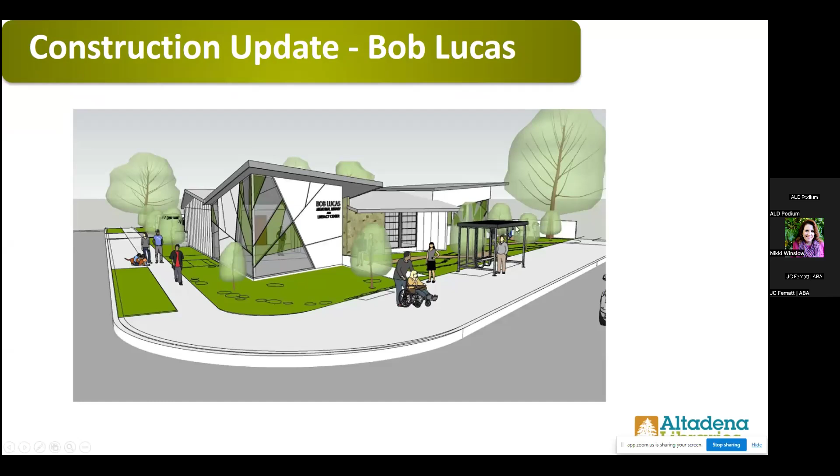So, construction update on the Bob Lucas. I'm actually going to hand this over to our construction manager, Ben, if you want to come up here real quick and introduce yourself.

Thank you, Jennifer. Good afternoon, everybody. My name is Ben Sawyer. I'm the construction manager with Huckabee for the Bob Lucas project. So I know we've got a lot to cover, so I'll make this really quick here.

We started construction last month. The groundbreaking ceremony was held on April 18th. This is an overview of the project here. You can see in the dark gray shadowed areas where we're doing our 2 expansions for the project. The good news was the project bid below the estimate, so we're off to a good start there.

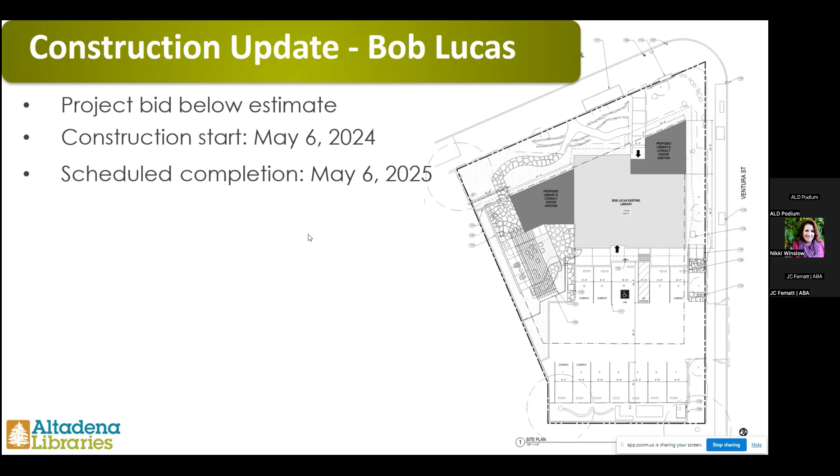We had our construction start on May 6th of last month, and our scheduled completion, we're expecting May 6th of next year. We are going to do everything we can to push that forward if possible, but that's kind of what we're looking at right now.

To provide a quick update of where we are right now, like I said, we've only been started for about a month here. So this is the exterior of the building, seeing the front of the library where the east side expansion is going.

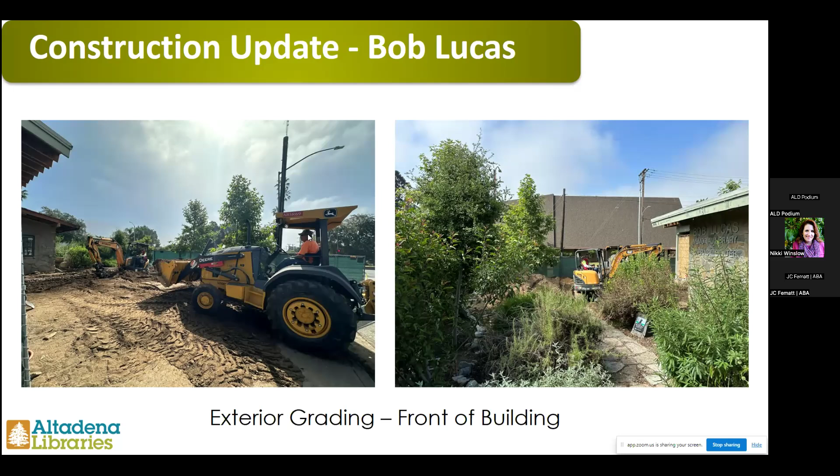We began grading and over-excavating here, getting the soil ready in order to build a new structure on it. And as we're doing that, we're maintaining the garden as best as possible. We have to take out some of it in order to expand the building, but we're doing our best to maintain that garden as best we can.

Moving to the inside of the building, you can see a before on the left side of the screen of what the building looked like before. This is facing the north side. And like I said, we've started demolition inside here.

So that's kind of where we're at now. We've exposed the beams and eaves, and where that plywood is on the back north wall there, that's where the building is going to expand outward on the north end.

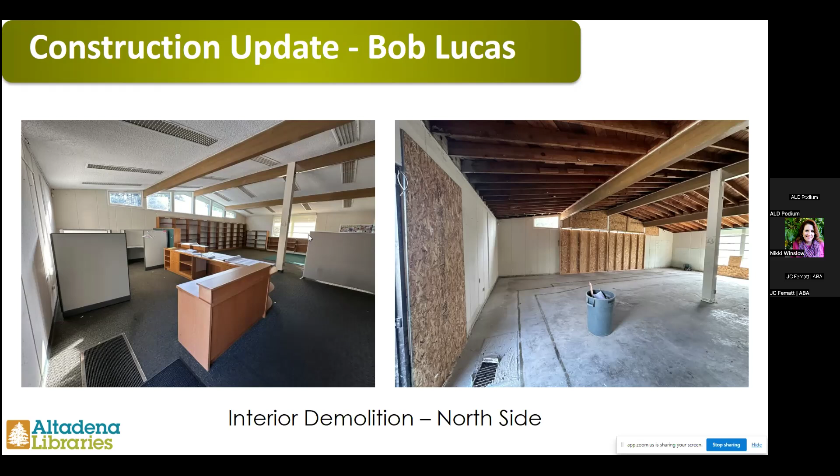And then for my final slide here, we have the south end of the building. This was previously where the restrooms were. You can see we've opened that and exposed that, and have started to do some underground work here to prepare for the new plumbing, new HVAC system for the new building.

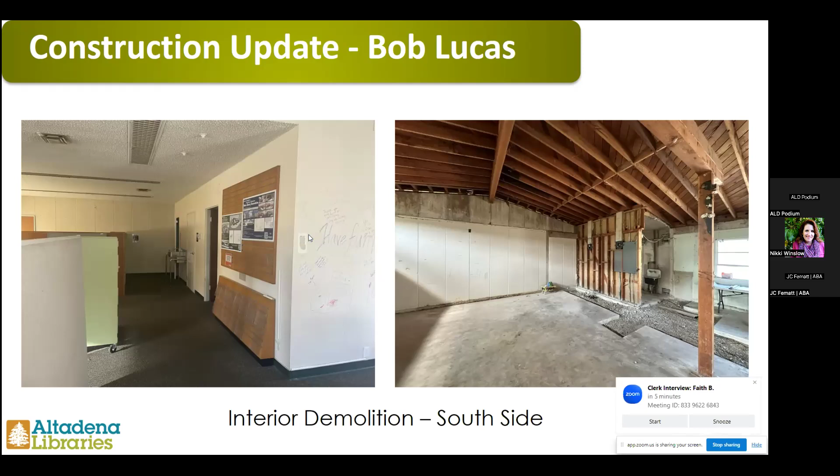Great, that was all I had.

I haven't been over there lately, so I'm unsure. Let me take a look at some photos and I'll get back to you. I'm just concerned about it being covered or whatever with all the vibration and work. Yeah, absolutely, let me take a look at some of my job site photos.

I'll let you know. Any other questions about Bob Lucas construction before we move on? I'm just trying to keep moving as quickly as we can because we've got a lot to cover in our hour, but stop me if you have anything.

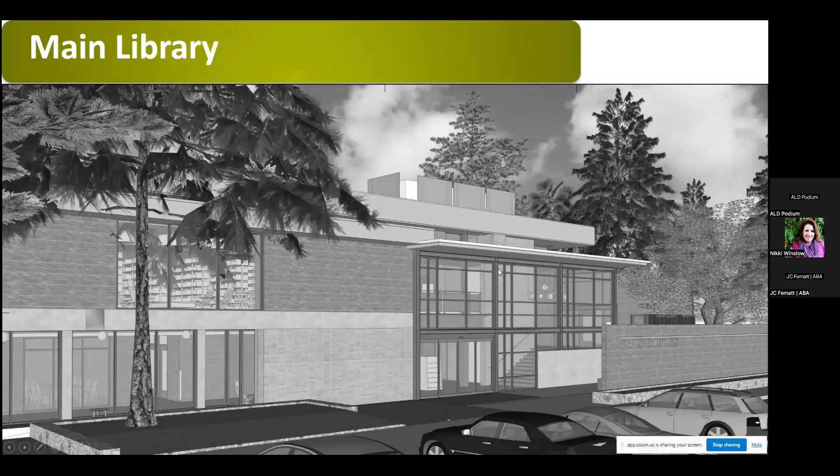Okay, moving on. All right, the main library project status. We're in the construction documents phase, about 75% complete. We're doing constructability review right now.

We've already submitted to regional planning for a conditional use permit, just like we had to do on the Bob Lucas. It seems to be moving a little bit slowly, but we're trying to get a bead on what's happening there and make sure that keeps moving forward.

We're also preparing to submit to the building department for plan check in the near future. And again, this project will go into construction after Bob Lucas is complete, so that would be at the earliest May of '25, assuming that we get all the approvals that we need by then. And that is all I have. I'm going to pass it over to, yeah, go ahead.

Do you know what the CUP is for? The CUP is because it's a library in a residential zone and didn't have a previous CUP. We argued that it shouldn't need one because of the minor amount of work we're doing. When we were working on the Bob Lucas project, they mentioned early on that if we weren't adding so much square footage, we could do this as a site plan review. So we asked that question multiple times: can we just do this as a site plan review since we're barely adding any square footage? The answer came back no, this is a CUP. So we're just trying to keep it moving forward as best we can and hit our scheduled date.

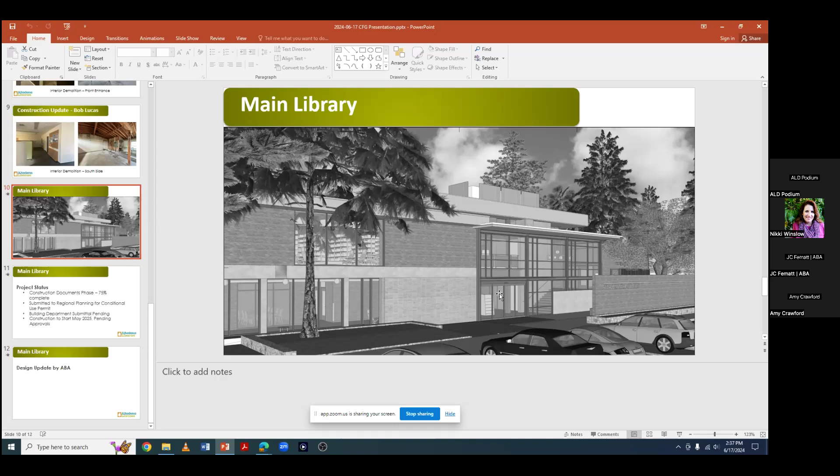But I'll turn it over to Amy now. Well Mark, let me ask you this - so there's not gonna be any little secret dots with your name in it, or somebody's name, that we won't know until 20 years later? Subliminal messages, yeah, well some architects, that's a great idea. The closest thing I ever did to that was on a block pattern, I used Morse code on a Boy Scout project - I think it said something like 'Boy Scouts are cool.' So we're nice, good people, if we did anything like that it would definitely be in the office. So is this how you think you're gonna get your name on it? Is this a request? People named Mark are awesome, yeah.

I was simply going to ask if at some point there would exist an elevation in full color rendering. We will do that actually - I feel a little embarrassed, I didn't think 'oh, they'll want to see this,' because we were so excited from looking at it.

Hopefully Amy may have that PDF and you can see what that wall would look like. Even if it's sent after, it'd be amazing just to get a sense of how all those pieces fit together. We probably owe you an updated image of at least the south side. What we really want is a model.

Amy, you there? Yep, I'm here. Sorry, can you see my screen? I hit share. Yeah, we can see your screen. We're gonna turn you up a little so you don't have to yell.

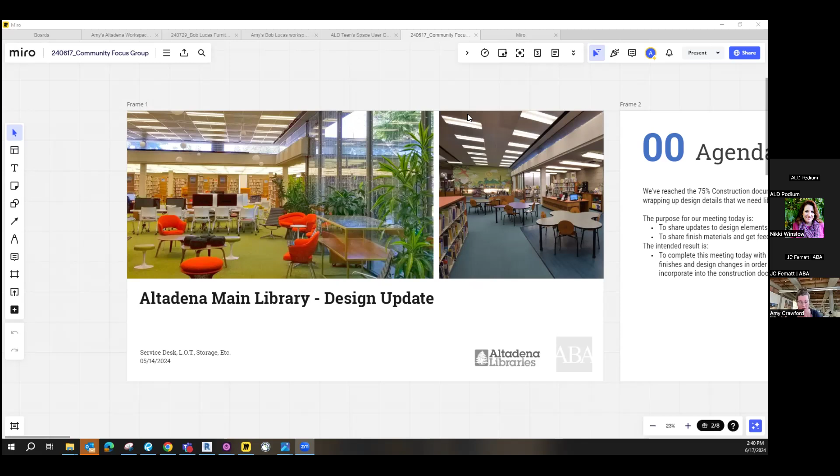If you have some really difficult questions, ask her. Thank you, Mark. So I cannot see all of you, so I don't actually know who I'm presenting to, but I think you can probably see me. What I'm going to share is not an entire design update, it's really just the last design update that we had a meeting for. It's going to show you some key renderings of some key spaces and some interesting updates that we wanted to share with the group. So again, not going to cover everything, this is just the slides from that meeting.

One of the main things we talked about is the service desk, the main service desk on the main level. We went through several iterations of this and decided to build something out that had more presence in the space. We really wanted to utilize the wooden tiles where we could in the library, and the service desk felt like a great space to do that. We received feedback from the facilities committee about some iterations we had shown, and this was the result of making those updates and changes.

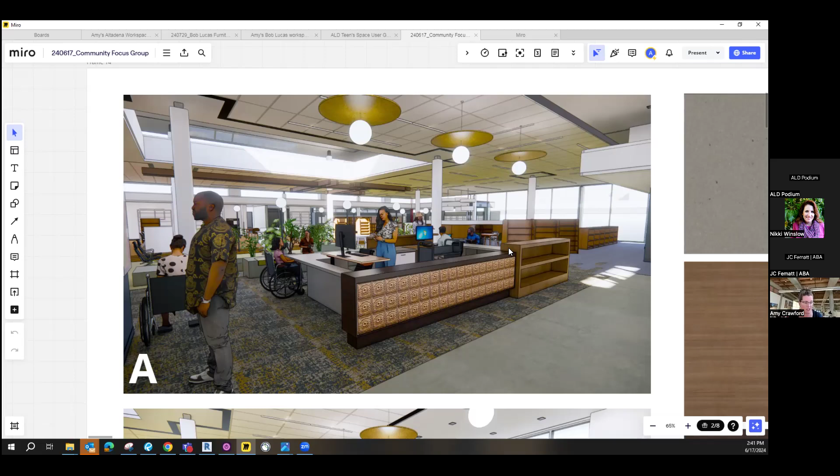So we dropped everything a little bit lower. When people come in the front door, just to the right of my cursor, they come in and it's welcoming. There's going to be a bookshelf here where they can display a variety of items, from books to things that maybe got created in the makerspace, pamphlets, or info about upcoming events. Then the desk surface is low around the entire thing, allowing access for people that might be mobility challenged or in a wheelchair.

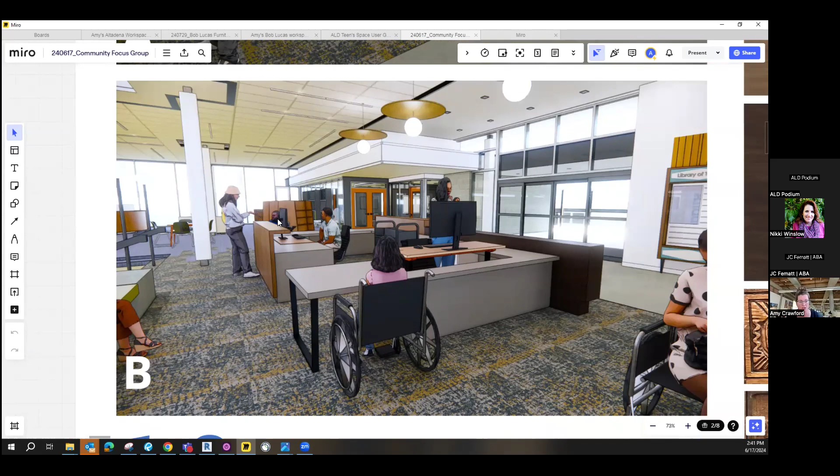The desks for the staff members are height adjustable. That's pretty much standard these days for ergonomic reasons, allowing people of different body types, heights, and sizes to feel comfortable at the desk—they can sit or stand. There's also a transaction surface here that allows somebody to, I feel like I'm showing my age when I say write a check, but fill something out or write something.

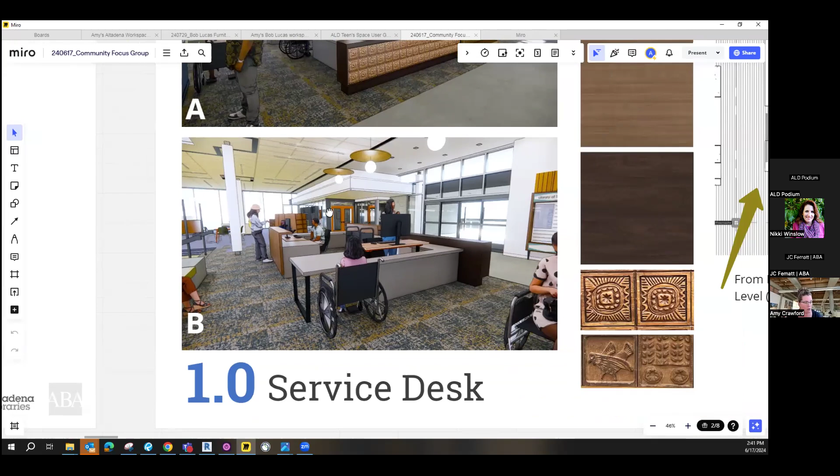You can see a bit more of the library in these shots. They're not fully rendered, they're just focused on the spaces we're looking at, but you can see the application of some of these materials to the desk. We're looking at using a material with a bit of a concrete look for the work surfaces, and then incorporating some warm woods and those wood tiles, so it'll be a nice warm juxtaposition against the concrete look.

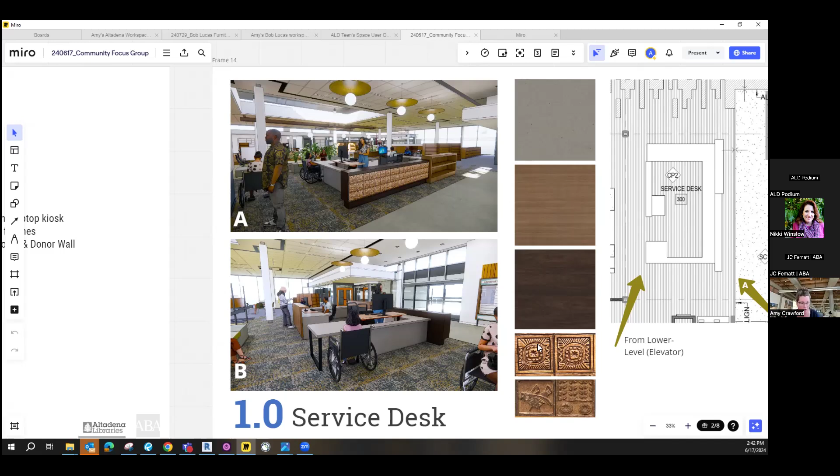I don't know if you guys have questions, so I'm going to keep going—maybe Mark, if somebody has a question, you can let me know since I can't see. Yeah, I'm keeping my eye out for that. Okay.

These arrows show you a little bit of what we're looking at. This view is looking at it from this direction as you come up the stairs, and this view down here is looking as if you've come off the elevator and you're coming towards the desk from there.

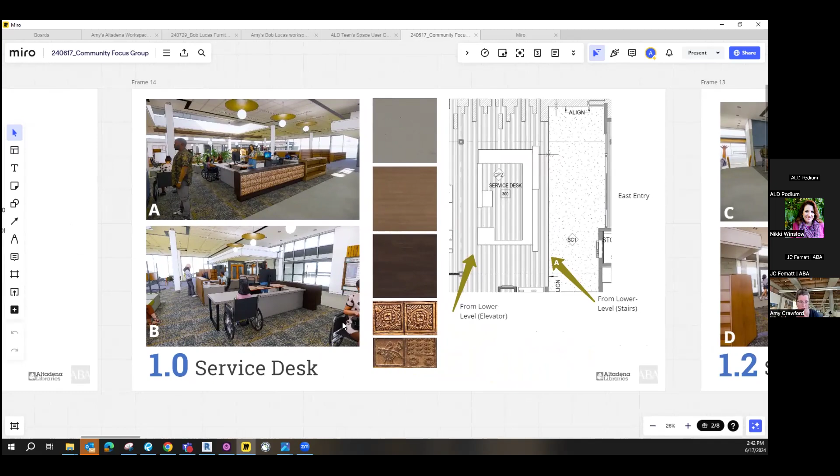Just two more views of that same space. You can see somebody waving here, you head down the stairs here, so you can see another view of the desk. This is from the opposite corner—this white shape here, there's actually a column there, so we just showed the column kind of so you can still see the desk. This is where the current Friends of the Library book stand is.

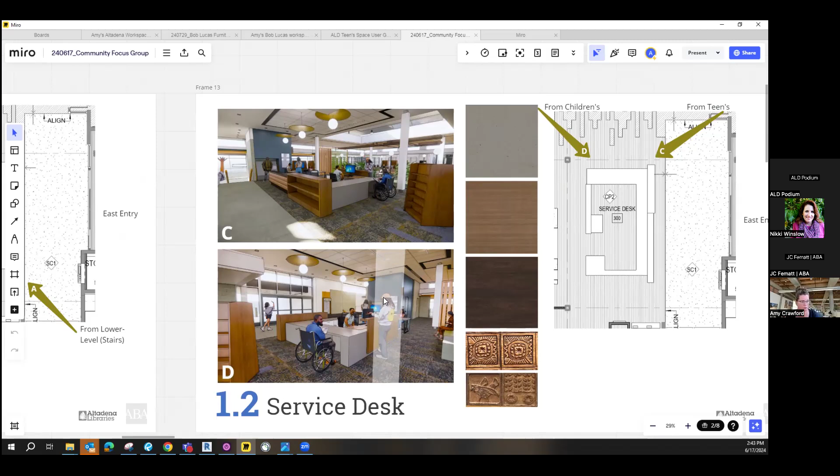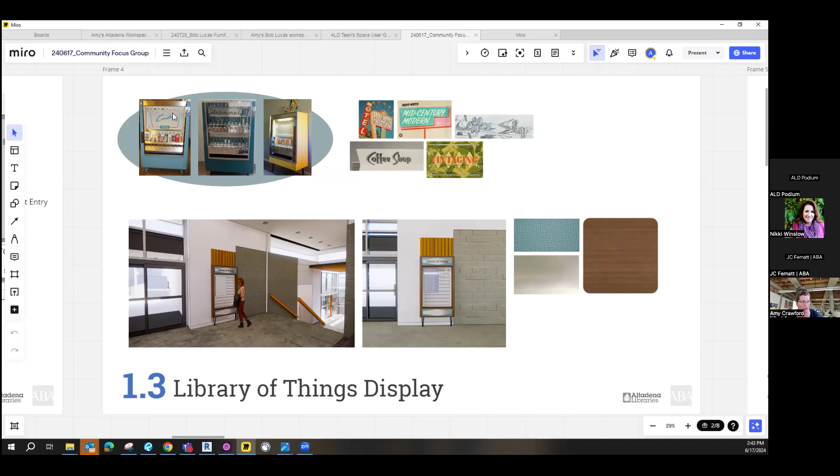Another really cool element we've incorporated into this space: right now you have a library of things as part of the library. We will have a space to actually display it, and the inspiration was vintage vending machines, to go along with the era of the building. It's in this space right here as you come up the stairs or in from the main level entrance—it has that vending machine look. It'll have little shelves on the inside, behind glass, and those shelves can have little 3D printed models of the items available to check out.

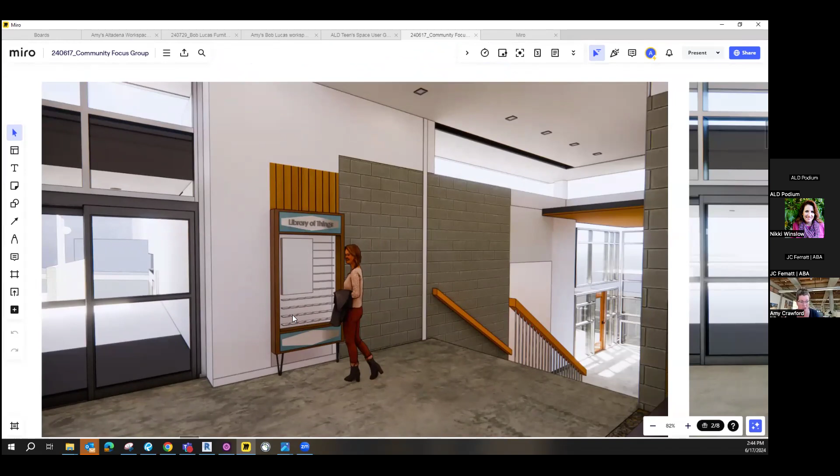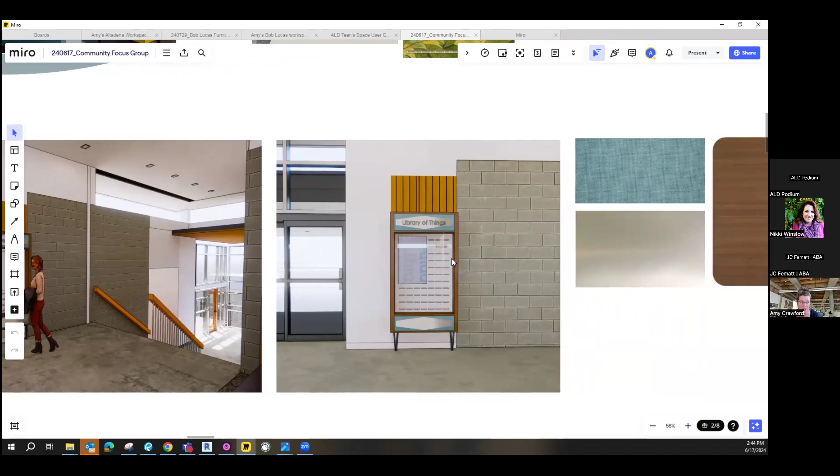It could have a little card or placard or something that indicates the item to be checked out, which library staff will maintain and change out as needed. There will also be a digital screen on the inside that has a list of the items, and the library staff will work with the library guests to check out that item. The finishes for that are here, the same wood tone we're using elsewhere in the library.

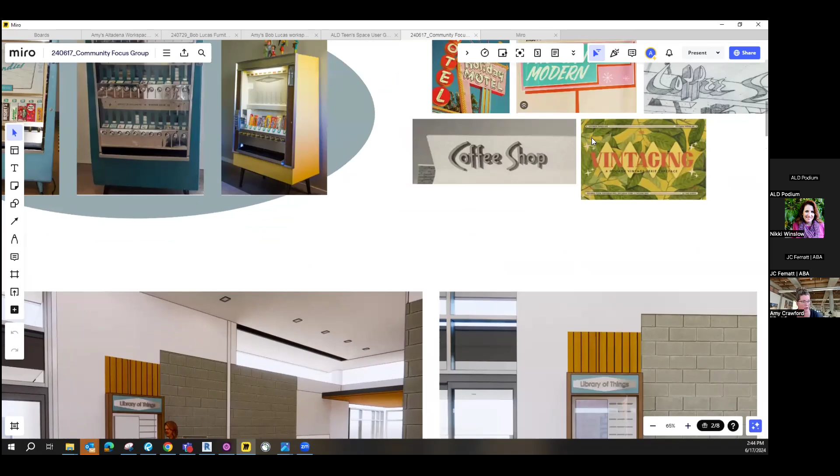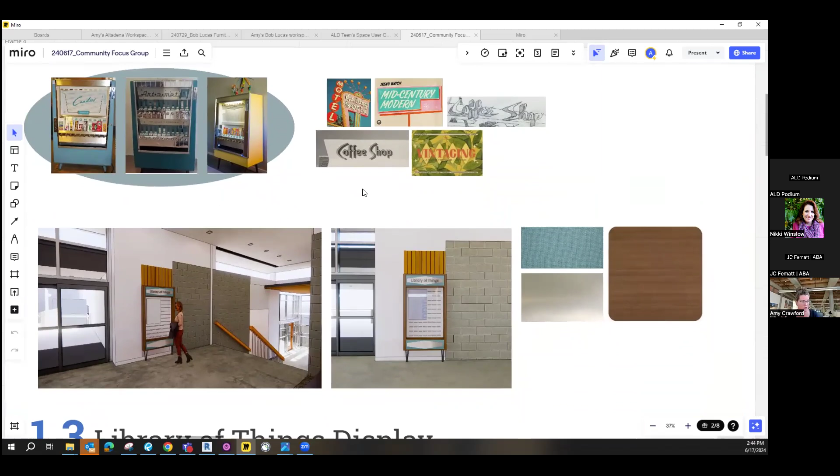I'm hoping to come up with some interesting signage for the top of it that's maybe reminiscent of some of the really iconic text that came out of that era. There's probably still quite a lot of that down in Southern California. We don't see quite as much of it up here in Northern California. So that's the display for the Library of Things.

We also have the storage room for the items, for staff to have it right next to the desk, right next to that display. So in this space we have a couple of different things I want to show you. We have a laptop kiosk that will allow people to come and check out laptops. We have a book drop cart, so there is a book drop happening here on this side. And then there's also a digital display.

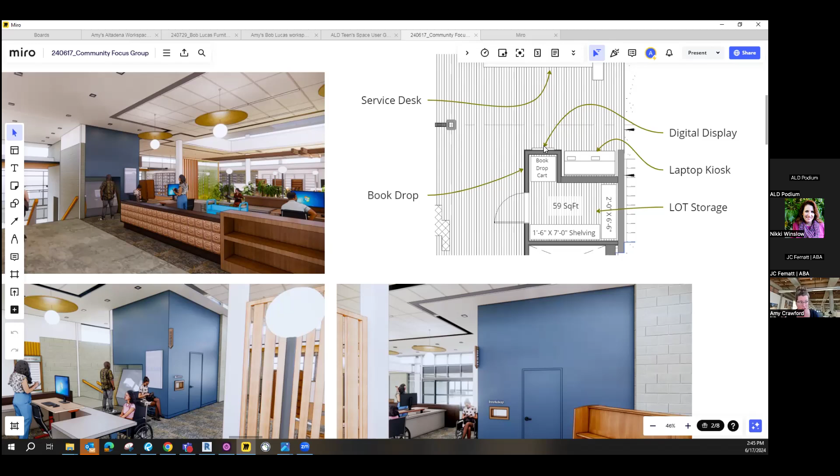So what you're seeing here, I'll show you this image. This is pretty good. So this is the laptop checkout kiosk. We'll have a digital display here, and then the book drop will be here. This will just go right into a bin that's inside this storage room that we have created, which allows for the space to hold the Library of Things items.

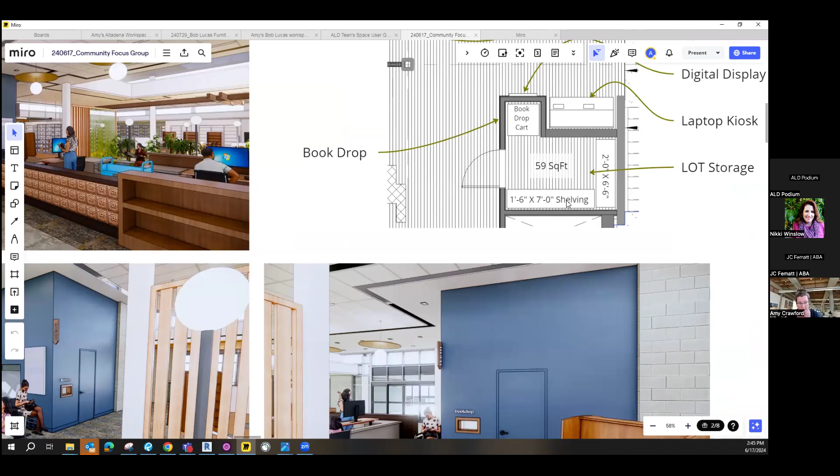So there will be shelving in here that will hold the banjo, the sewing machines, or whatever isn't checked out will live in this room. And that is right there again, adjacent to the service desk. You come off the elevator from over here and it's all right in this direction. You come off the stairs and it's right here.

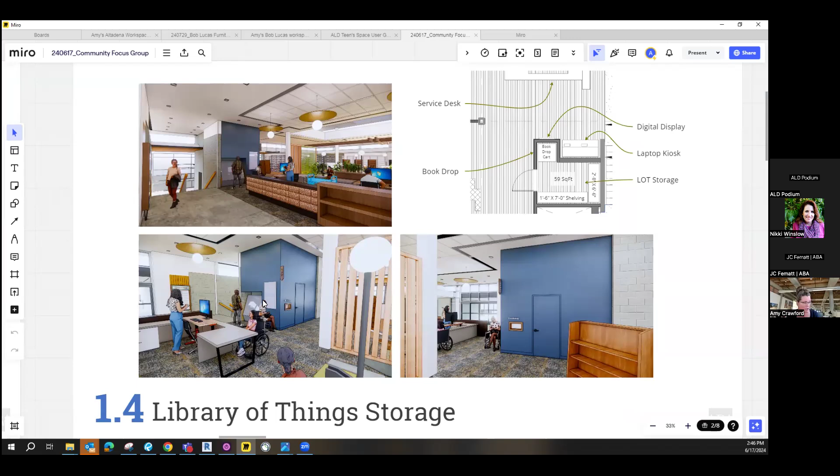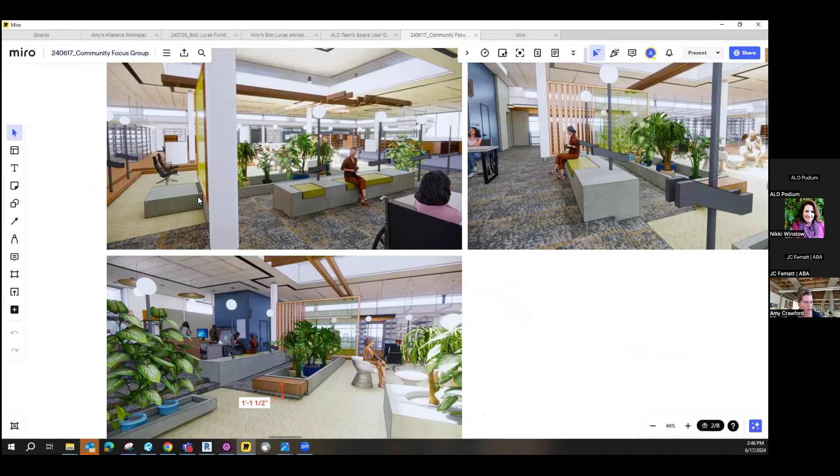Another design element we worked through the details on and came up with something interesting on is this plinth, I guess we could call it, as you come down the ramp. So we now have a ramp to come down into the sunken living room, or I've heard it called a couple different things, reading court, etc. In order to do that and not have people fall off the stair or off the ramp, we had to put something here that would allow that to be safe. So we incorporated seating into it.

It's meant to mimic the concrete that is happening in the existing planters over here. And then we'll put some cushions in it so people can sit here. Maybe they're waiting for service at the desk or waiting for somebody to meet them. It's a great little place to perch and sit.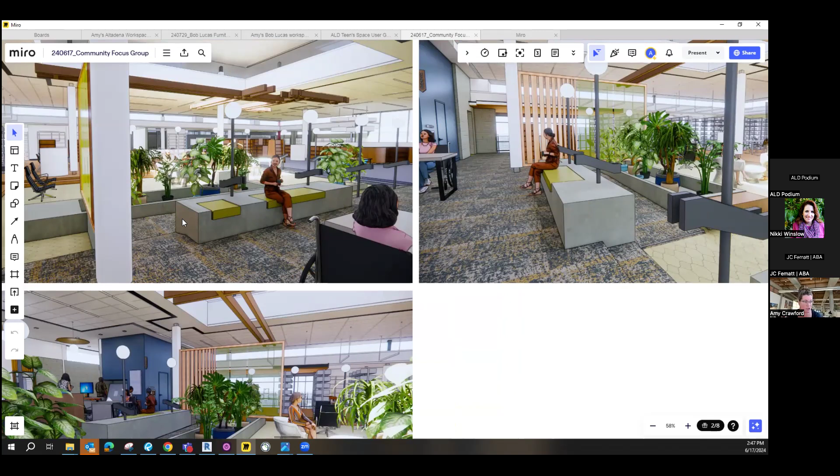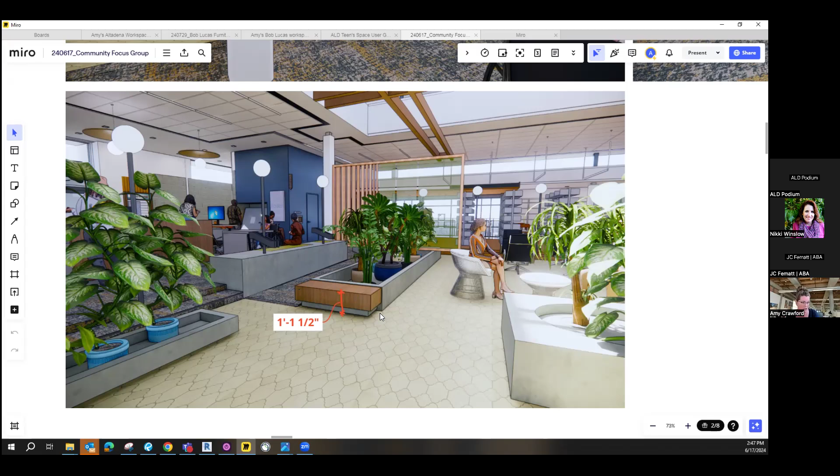Another spot that we needed to come up with a design solution is at the end of this planter. Because we have the ramp, we needed to put something there to block that end of the ramp so somebody wouldn't walk into it and trip. So we've added an extension to this planter unit here. That's what we're showing here. It's kind of nice because you can see a different vantage point of this library space from this location.

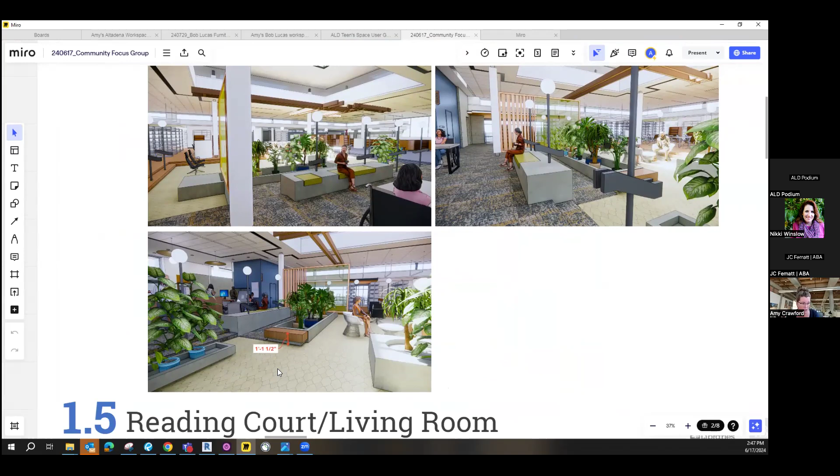Another key thing we highlighted here is that we are aiming to keep the existing tile for its historical significance rather than replacing it with a new material. So that was a revised rendering showing that we're keeping that tile.

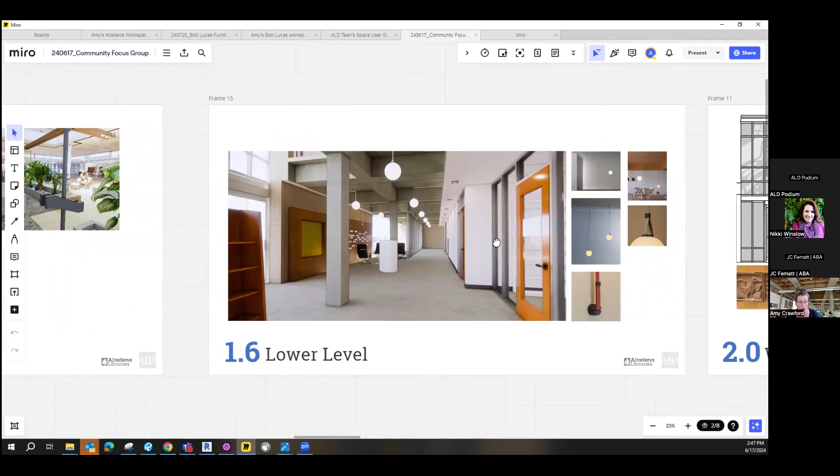Another really neat thing we worked out is on the lower level, we have this space and it's kind of an alcove here. We went back and forth a lot on what to do about the lighting there because we need to adequately light that space. We have these coffers and we don't want to have exposed conduit, which was challenging. So we found this really unique light fixture that allows us to basically snake the power in the direction we need it to go and pull the power from a location where you can't see exposed conduit.

The way we decided to do that was to pop out this really warm toned wood wall, again using the same woods we're using upstairs, which allows us to hide the power in it and gives us the space for a community board as well as the donor wall. So we're using this space on the lower level for those things.

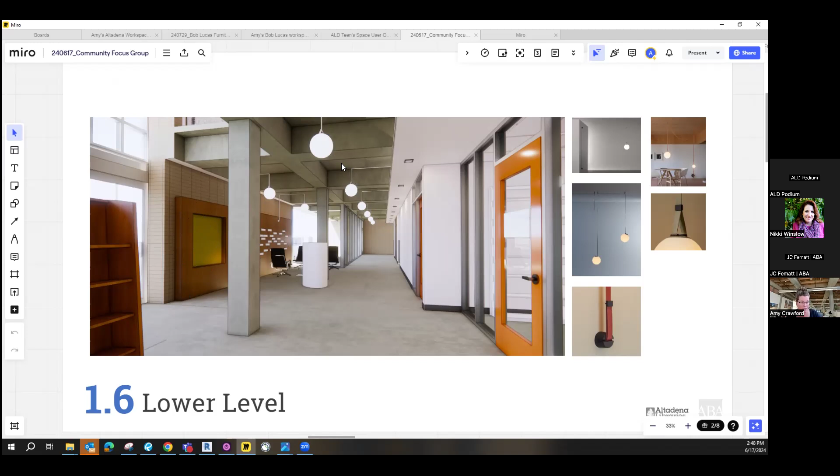And then we are mimicking this light fixture that is headed down this corridor. We had something different here and we changed it to this. These are a couple of views from the manufacturer's documentation. This is a little tough to see, but this is probably the one closest to the look we'll have. It's just a little bit shorter, but this light fixture can do a lot of really cool things. That was what we were highlighting here.

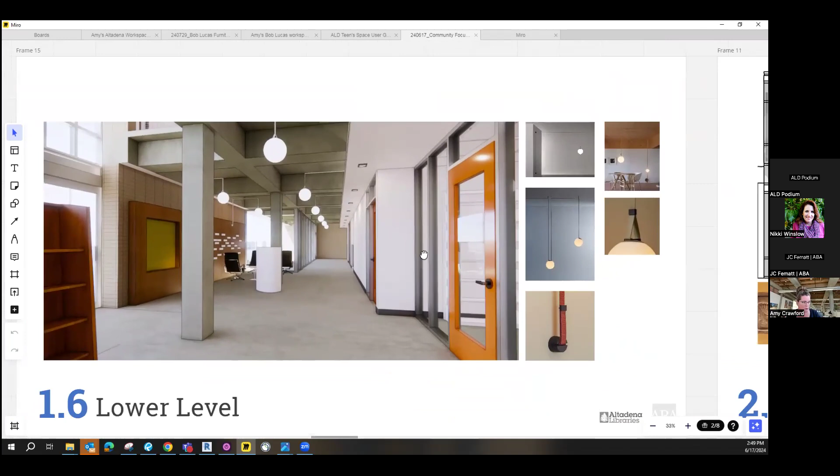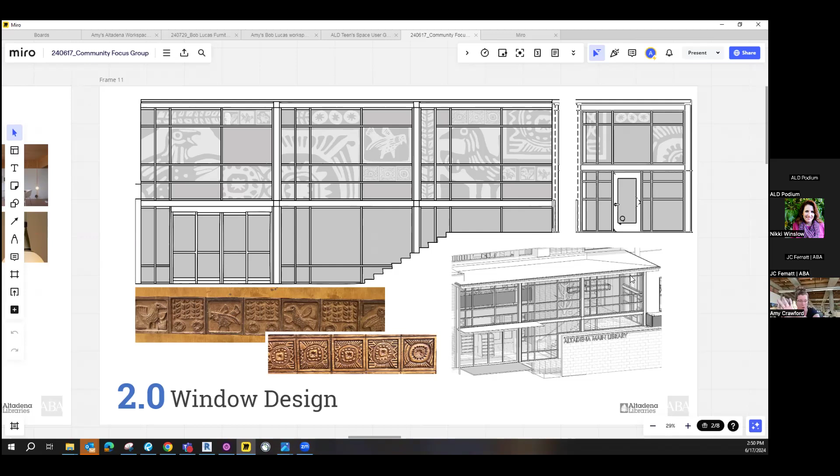This here is the front portion, and this little piece over here is as you turn the corner over the door out to the patio, so it does wrap around. That is what I have from that last presentation.

Mark, is there anybody that has questions? Can you put it on the window design real quick? I want to point something else out.

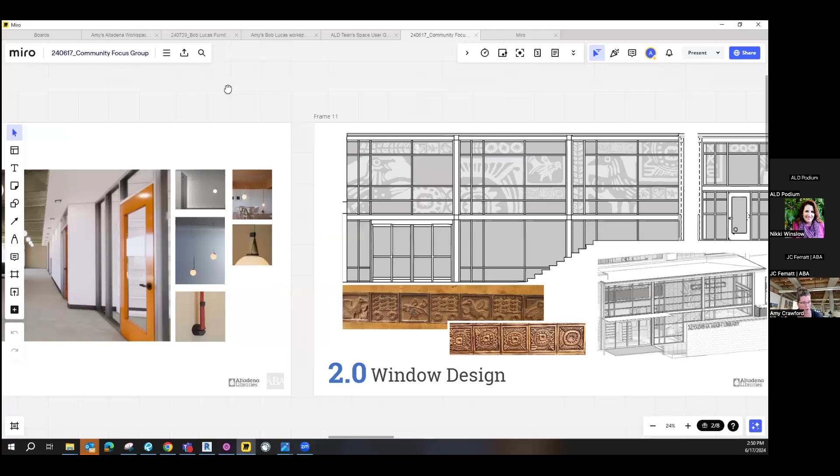So, any questions on this? Where are we going to dance? Say again? Where are we going to dance? Where do you dance now?

In the main space? You're talking about second Saturdays? Yeah, that area will still remain or be available for that. That was one very important aspect when we laid out everything.

We also have what they call an additive alternate. That is an option where those front windows become sliding doors, so you can open it up to expand more, very similar to what we're doing here, and there'll be a deck out here.

Sorry, I couldn't quite hear the question, but I'm assuming you answered it. Where are they going to dance? What's the question? Where are the books? Oh, no books, the books are no.

If you go back through some of the other images, we have different areas where collections are located. Stop right there. You can see in back there, this is where the adult collection is. We're using the collection to kind of segregate by adult reading and more intimate spaces. For the children's collection, it sits in the opposite corner, to keep them as far away as possible.

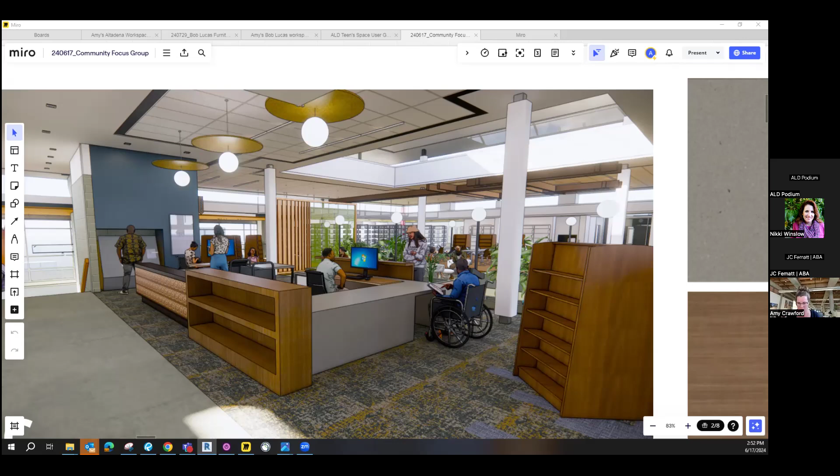And then the teen or young adult collection is in their own glass enclosure so they can be teens and young adults without any issues.

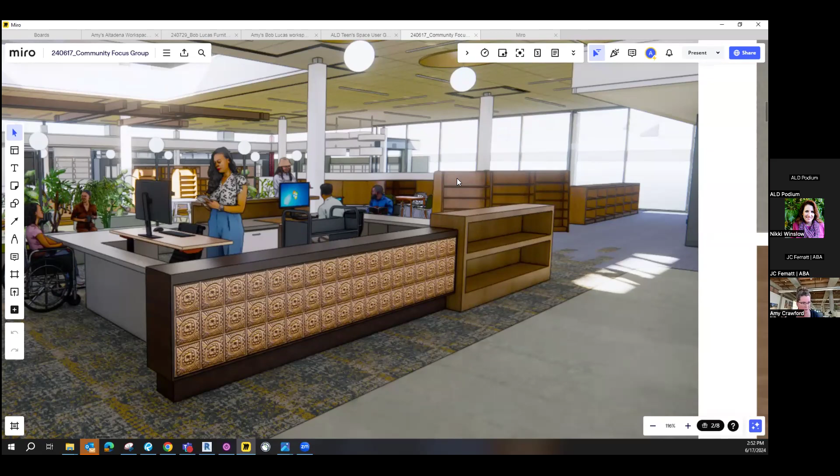You can see this looking over the service desk back to the children's area. Their shelving is lower because they're lower, so it's harder to see here, but their shelving is all back behind here. And then Mark mentioned the teens area that is enclosed, back behind this door and this glass wall. They again have their own space.

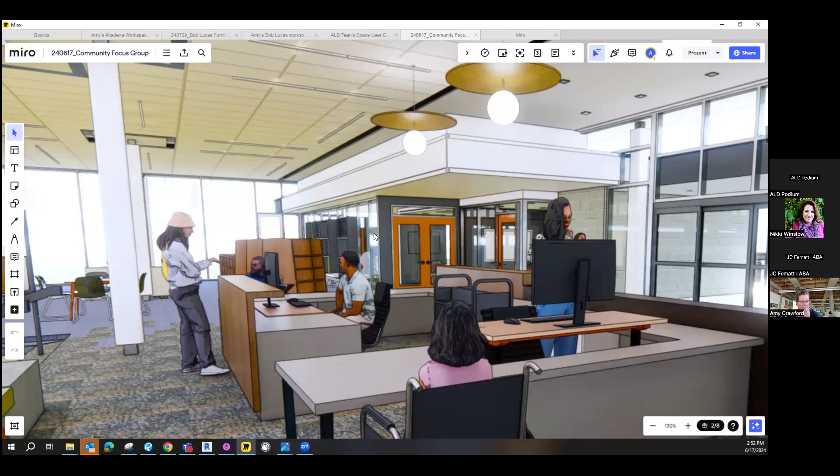Young adult. Any other questions? Was the library of things going inside that area? I mean, not library of things, I'm sorry, the fab lab? The fab lab has moved downstairs. It originally was going to be here.

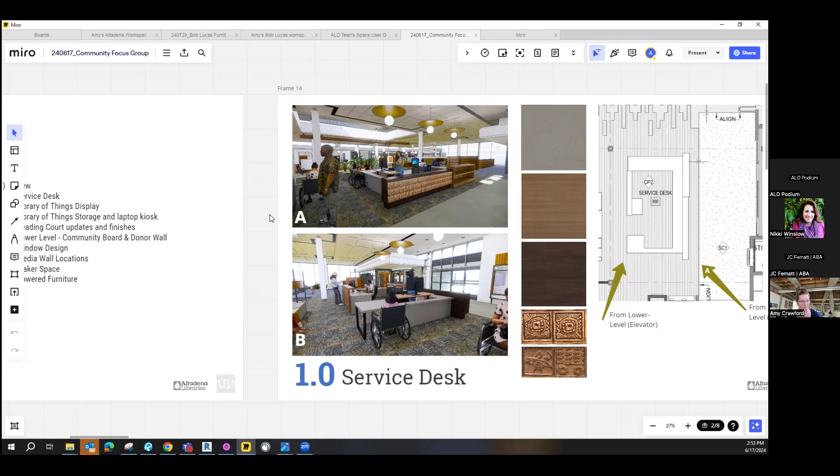We couldn't do the full addition. It was thought better down there, because really the top floor is maxed out for these kinds of functions, unless we wanted to move somebody down, and that didn't make a lot of sense. Better sound, not soundproof, but... well, it's concrete, I don't know, the floor isn't separating them, but it actually, I think, is going to work well. It also allows for after-hours operation, if so chosen.

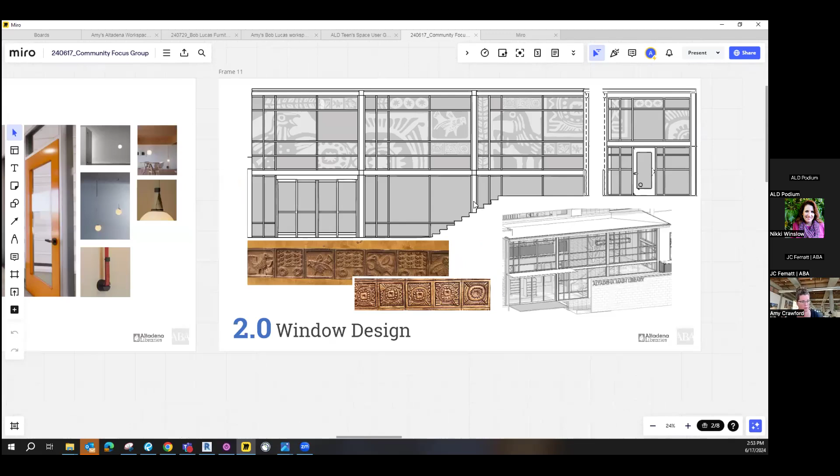So back in the 2.0, Amy, go back to 2.0. Why not, the windows are... so on that one right there, where the wall is, it says Altadena something library. Main, Altadena Main Library. So that wall now, the glass isn't coming all the way out to there. No, this is axonometric, not a perspective, so this is the existing wall.

There'll be a low wall and planter that brings it up to this mid-level, and then just a paving area. So all that storage and utilization out there gets put inside a room somewhere? Some of the storage is being relocated to the west side, creating pads for those metal sheds. I'm not sure about the other stuff.

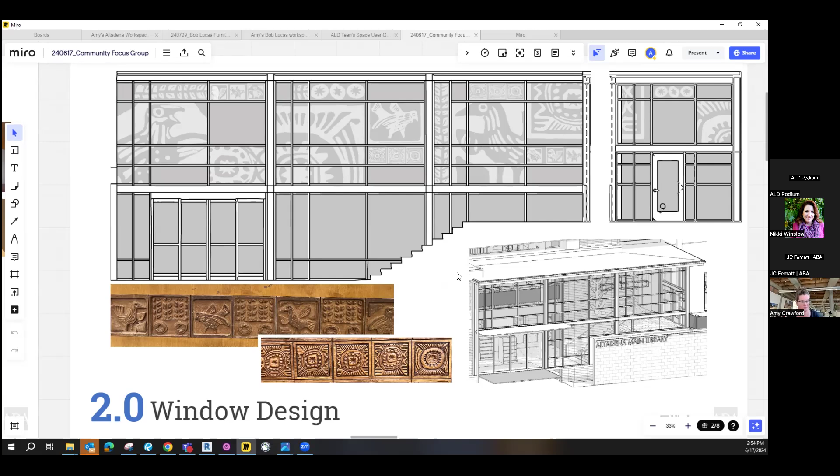I think it looks great. Thank you, the glass is really... Pretty exciting about that. Very exciting about that.

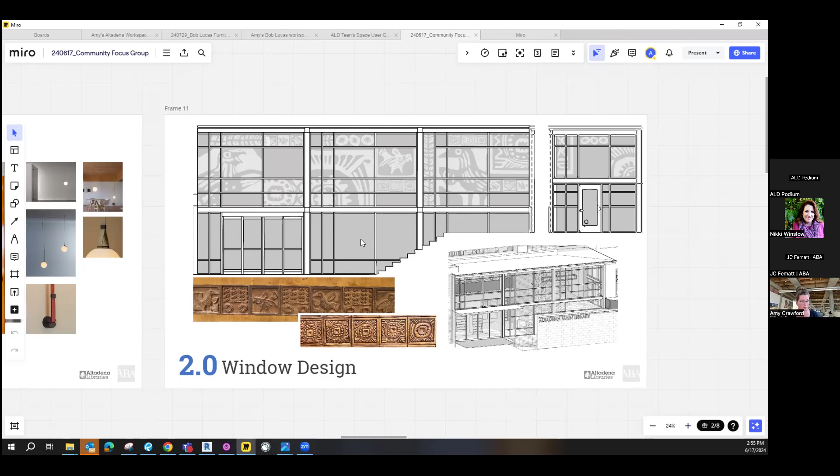Absolutely, yeah. Hi everyone, I'm kind of here behind the scenes. I'm JC Fematt, senior project manager with ABA, working on this Altadena Main project, as well as assisting with some construction administration on the Bob Lucas branch. So happy to be here, working behind the scenes.

Yeah, I don't know if you recall Supriya, she was the project manager. And she is, I think she's retired. I should pull that up... with JC. Okay, all right, go for it.

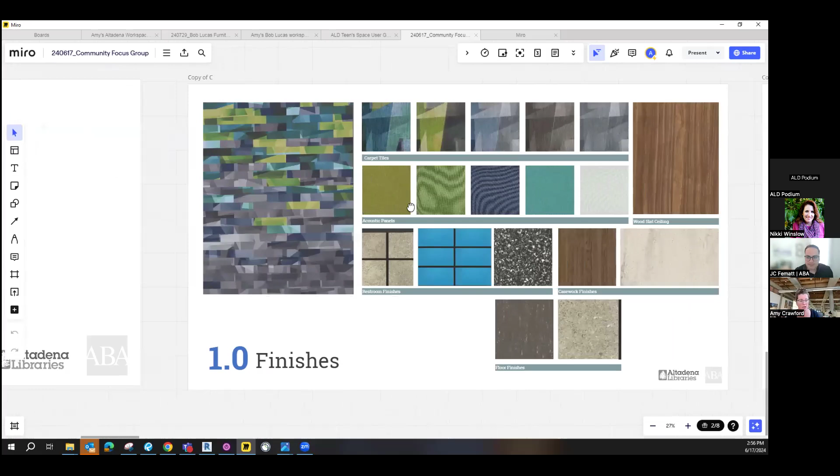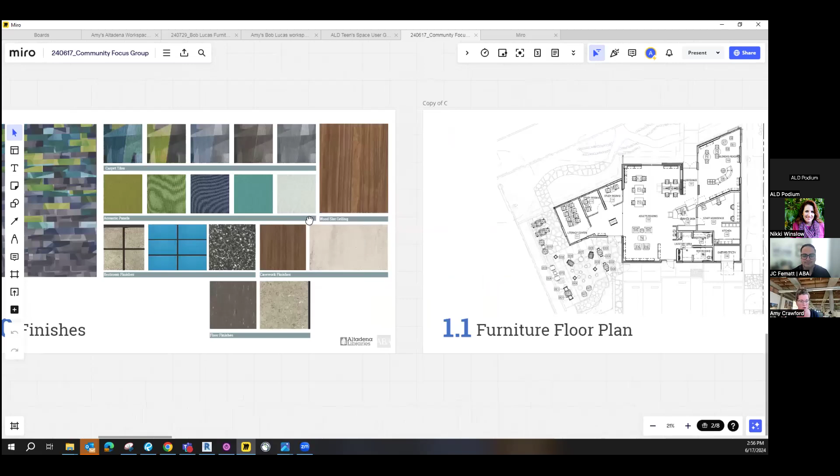Okay, so this is just a copy of the last meeting we had to review furniture. This is a high-level look at the furniture we have for the space. These are the finishes for Bob Lucas: your carpet, tack panel or acoustic panel finishes, some tiles, casework, flooring, and the wood slat ceiling going into this space. I'm not going to go over all of that, but this is here for reference to look at the furniture plan.

This is a separate ball of wax from the construction, so this is the plan in its entirety. You've got the children's area here as you come in. We have adults reading here with some computer tables, some basic tables for people to sit at, and a small lounge area. This is the literacy center and study rooms on this side, and then we have the staff workspace here, with the service desk smack in the middle. That's a quick overview of the space.

We have a really nice outdoor space as part of this library, and we will be populating that with outdoor furniture as well.

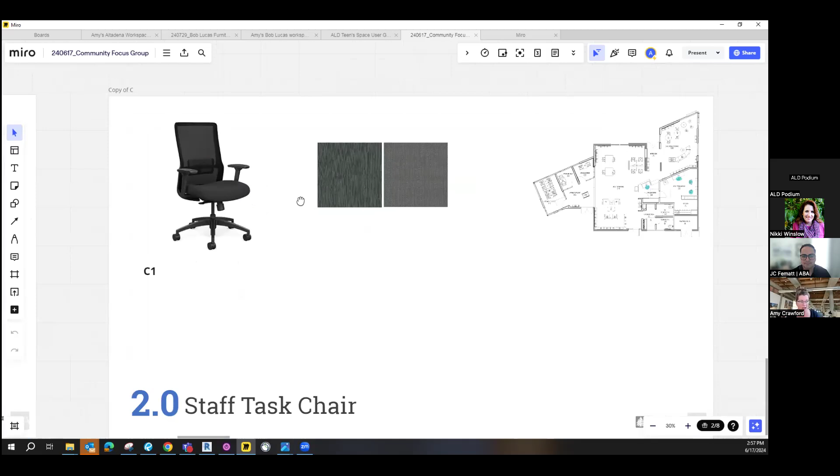So, super exciting staff chair, a comfy chair. I'm actually sitting in one of the same ones right now. Just keeping it basic, in some solid-ish sort of grays.

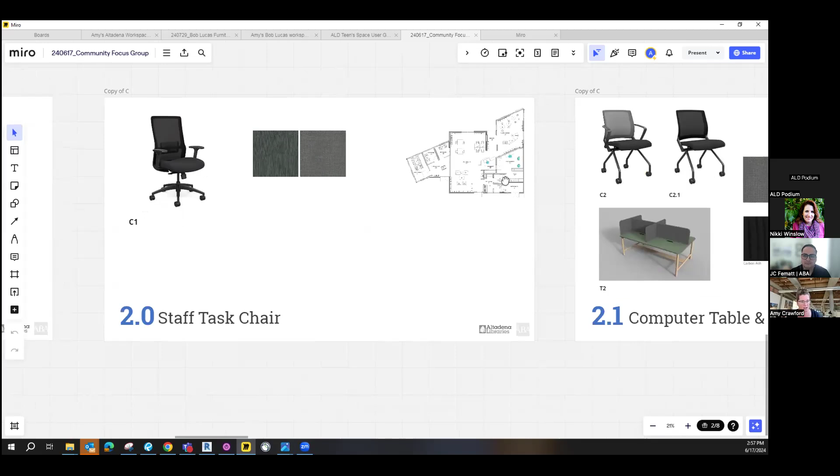This I need to update because we've made some changes—I didn't get a new rendering yet—but it's a computer table that will allow for 4 stations for library guests to sit at. Our chairs will be gray on the back and aqua teal on the seat. The desk itself will have a carbon ash wood leg, a warm wood top, and a bright pea green for the panels that separate the people sitting at that station. And that, again, is right here.

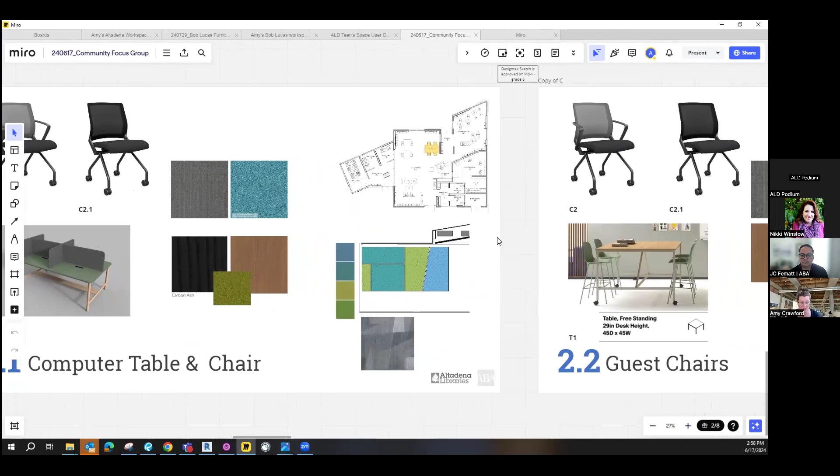This is just some reference for other stuff going on in the space with the acoustic panels. We aren't doing any paint on these walls as far as accent colors—it's really coming from the colorful acoustic panels.

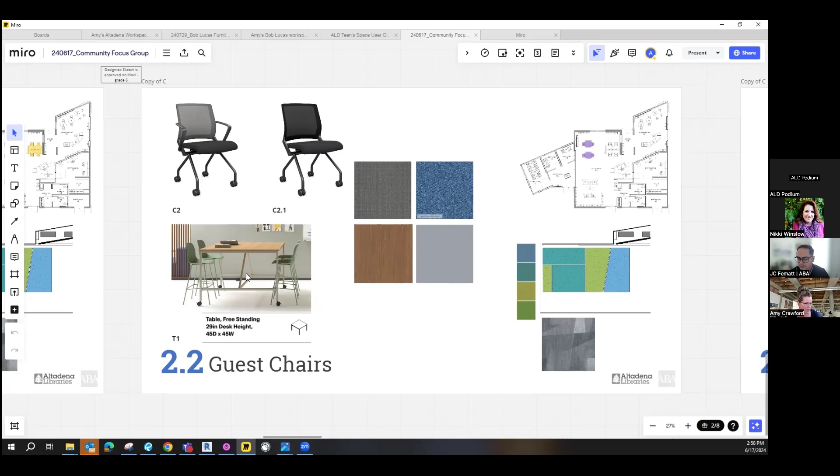This has been updated—we have 3 tables here now, where people can sit with their computer to read, play a game, dominoes, whatever. And then some chairs where the seats flip up and nest. They don't quite look like this because exact images weren't available on their website, but this is the line it comes from.

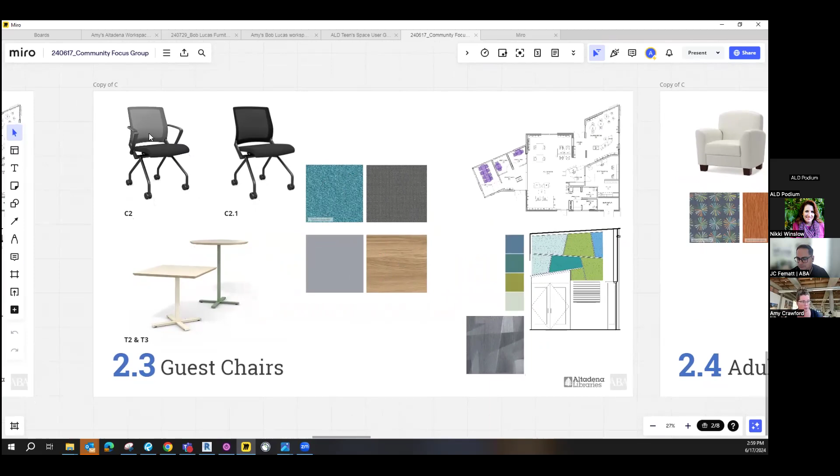As you move into the literacy center and study rooms, we have some more simplistic tables, a little smaller in these finishes. Our chairs are pretty much the same, but with a gray mesh back and the aqua seat again.

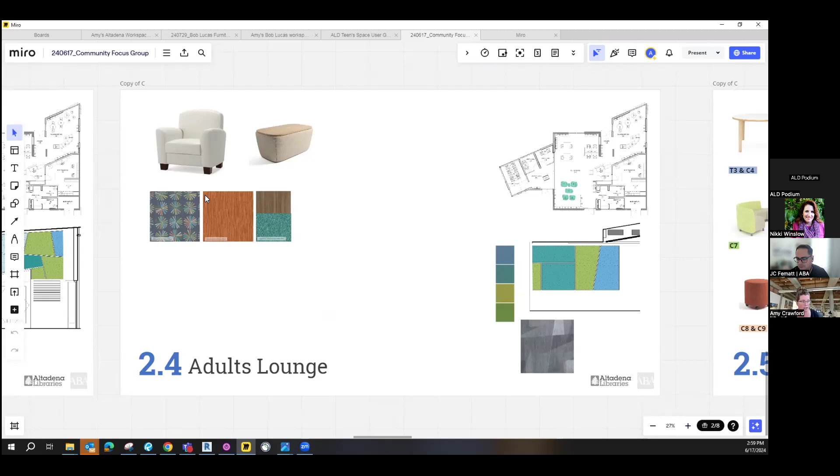For the small lounge area in the adults area of the library, we went a little off the color palette to do something different—using a more colorful pinwheel design with the inclusion of orange on the chair. We also have some soft ottomans being used as a coffee table and side table, in these colors, with fabric on the base and a wood tone top.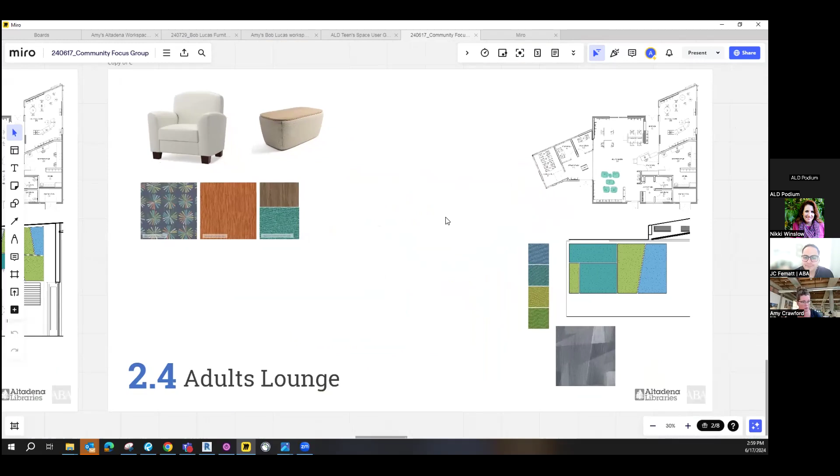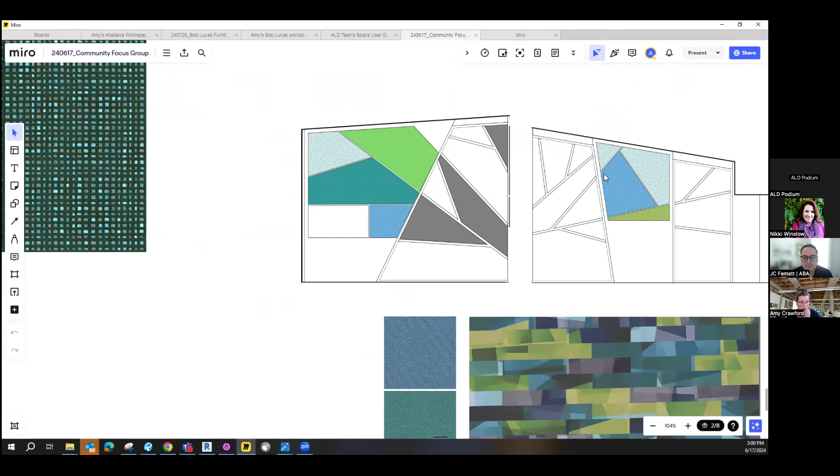Our children's area is going to be really fun, energetic and bright. We've got angled windows right on the corner of the building, super prominent as you drive down the street. As you come inside, we've continued the lines of those with the acoustic panels on these two walls, so you can see a representation of that here.

This is the children's area again, so those windows are here on this pointy corner. We've got a couple of tables and chairs for the kids to sit at, some soft ottomans that can be moved around if they're doing story time. There's a unit here that is children's size and height, with a soft ottoman here. I'll show you what we've got for that.

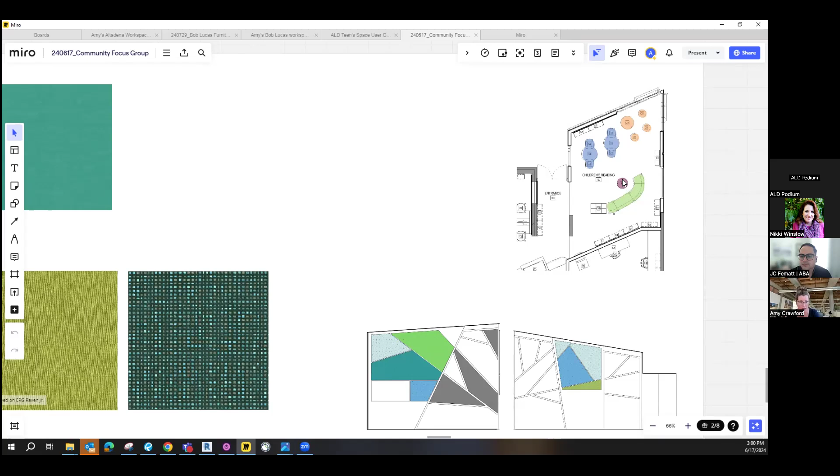Our tables and chairs are going to be this maple with this greenish tealish color on the seat, similar to what you see here. This image is not reflective of the exact shape we have, but it's the same line. It will be this type of seat with a low back and low seat.

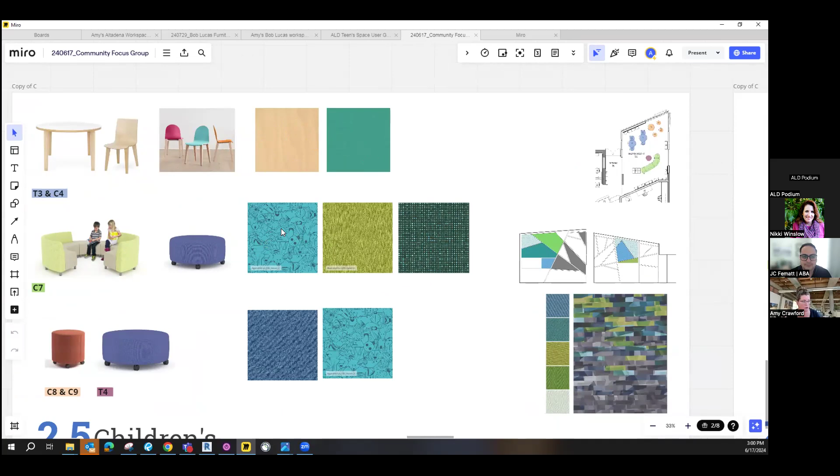The finishes for this unit are this one with the animals, bugs and birds. If you know the artist Charlie Harper, this is a print from Charlie Harper. These are all what I'll call wipeable fabrics—you might think of them as vinyl. We try not to do vinyl as much as we can these days, unless it's phthalate free and better for indoor air quality. But these will all wipe off easily if something spills.

So these two are on that sofa unit, and this one here is what's on the ottoman right in front of that—so that's these guys right here. And then this little variety of small ottomans over here will be a mix of this blue and again the print with the animals, bugs and birds, so there's a lot of color happening in this space.

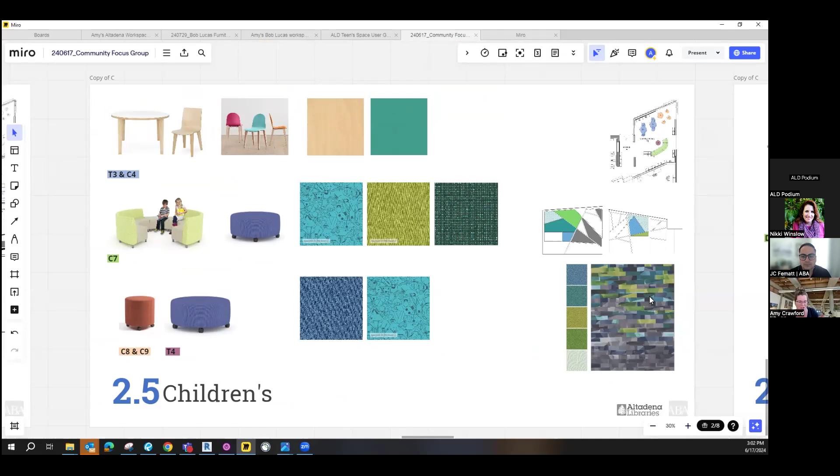We have this concentration of colorful carpet that subtly peters out to more of the gray. As you come across into the adult area, it's more gray, and then as you go into the literacy center, it does this again, concentrating the color more as you go farther in.

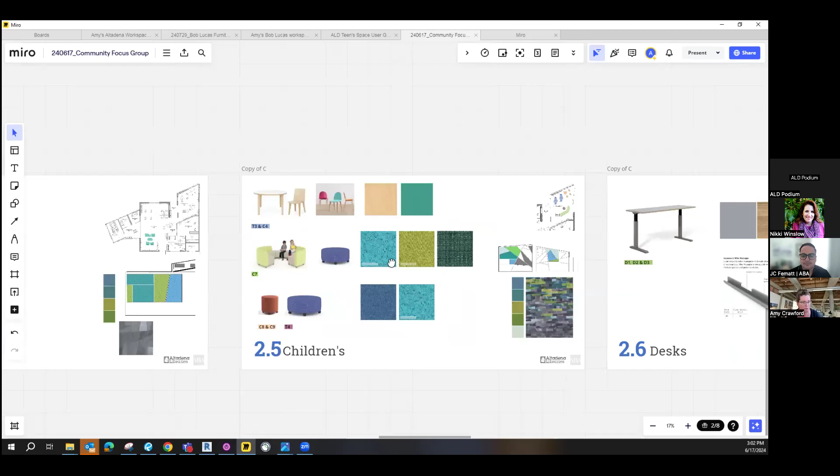We have a couple of desks for staff, just two—one at the service desk and one back in the staff space. It'll be a height adjustable desk in these finishes, and we've thought about things like cable management, so we've included that level of detail in our spec documents.

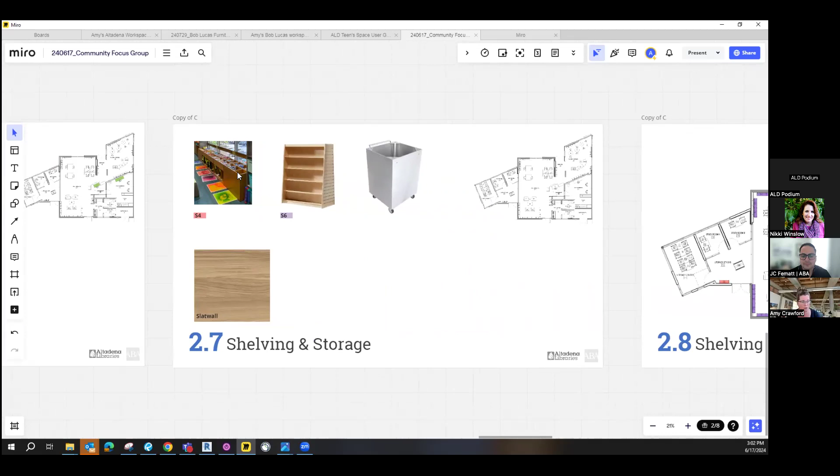We have a couple of things that we're going to reuse—one of these book bins that is at Main right now. That's going to go here at the end of this seating unit so we can have board books and things the kids can look through a little differently than just on a shelf. A couple of other miscellaneous items back in the staff area.

We'll have the book drop. We have just the one gondola that's here outside of the study rooms on your way back to the literacy center.

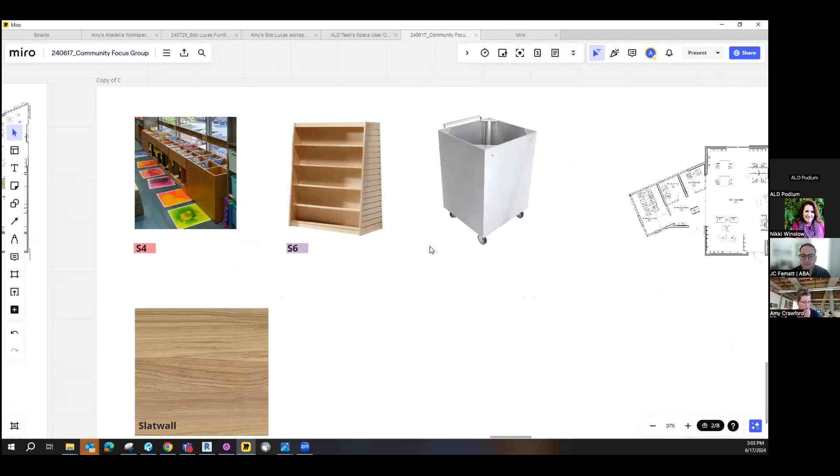The shelving is a big part, as you know, of a library. We are planning to reuse shelving from Main and have it—I'd say not necessarily refurbished, but have new end caps put on that will work better for the color palette happening at Bob Lucas. I always just call it Bob.

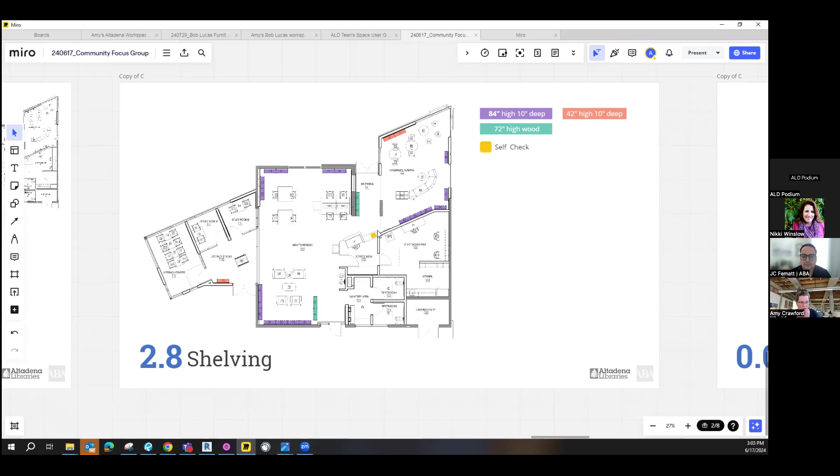So you'll see here where we were working through the heights we're using and what will be going into the spec document. Our self-check is here on this counter, right next to the staff member that is here.

And then we added outdoor furniture, and that's what this is indicating. You can see there's a variety of pieces here. I won't go in depth into this, but I know there's a faux grass here, and we have either a paver or concrete that goes around that and back into this space.

So the chairs—fun fact, I was out this weekend and actually got to sit in some of these that were at a shopping center, so I was happy to see one in person out in the wild. We've got a variety; we try to always have seating options that will work for somebody that wants an arm so they can push up to get out.

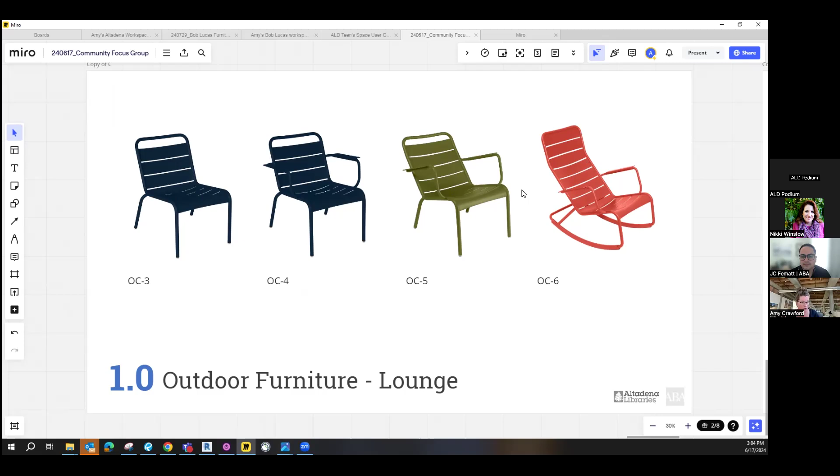Maybe somebody doesn't want an arm, something that's a little more reclined, a little more of a straight sit. And then we also have two rocking chairs for fun. These are the outdoor lounge chairs.

Then we have, you wouldn't call this a lounge, this one is the one that will be at a table. So where we have some cafe tables will be these chairs. I think this is the one that I sat in. And then we also have some children's furniture.

We'll have the matching table and chairs where we have that happening. We've got a couple of little benches or stools that we'll be using that are softer. And then maybe for story time, they can come out and they have these little cushions that go on this rack, and they can pull those cushions out and each get to sit on their own cushion if they're having outdoor story time.

So that is the update for furniture for Bob Lucas. Are there any questions about that?

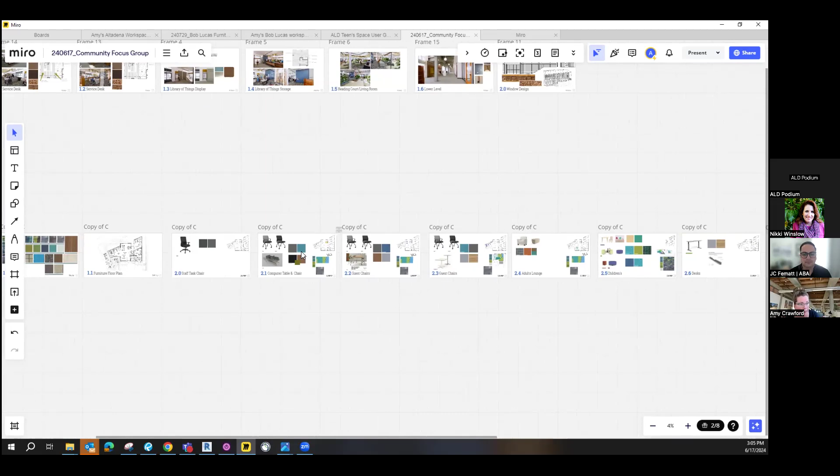On the 2.0, go back to the picture that shows the outdoor garden area also on that. This one? Yeah, that'll work.

On the landscape plan, I thought the children's area was on one side and the literacy area was on the other, only because from the literacy main room over there on the far left, is that still going to open to the outside, or is the only opening through the other doors? It's just the pair of doors to the outside.

Pair of doors provide the same purple tables and chairs there. So that's a sliding door? No, I understand that one, that was always good. I'm saying on the far left, there's not a way to walk right out to the outside? And this has always been the literacy center space.

So are there windows there so you can see what's going on outside? Yes, sir. Those represent windows, a lot of them.

On the same room you mentioned earlier, an alternate could be for a movable sliding door. That was here. Oh, yeah. And is that still under 300,000 for the pricing on that additive? I don't recall.

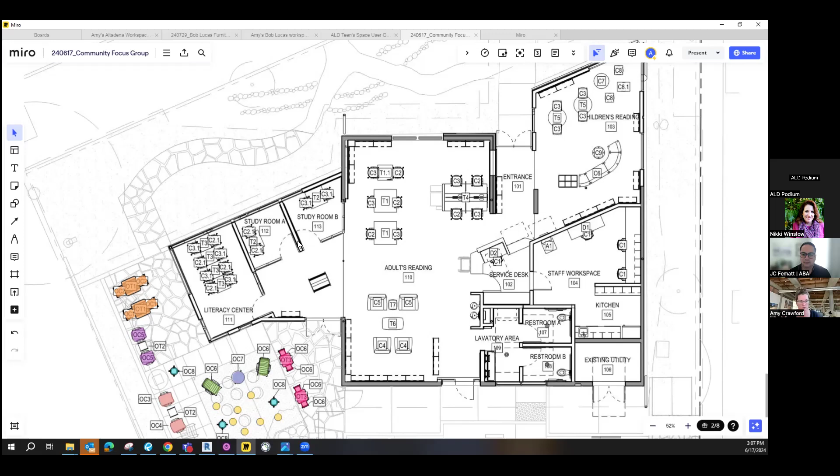Just asking, this may be redundant and I could be mistaken, but looking at this entire outdoor area and trying to conceptualize where that is, I'm guessing that wall is our mural. The mural did get preserved.

Yes. And then we've annexed that parking, this beautiful exterior space, and all the parking got put over here, and we were able to make that happen without changing the initial plan. That's accurate, you check. Okay, great. One thing is, I believe it's not a refurbishment of the mural, it's going to be a restoration, a full restoration.

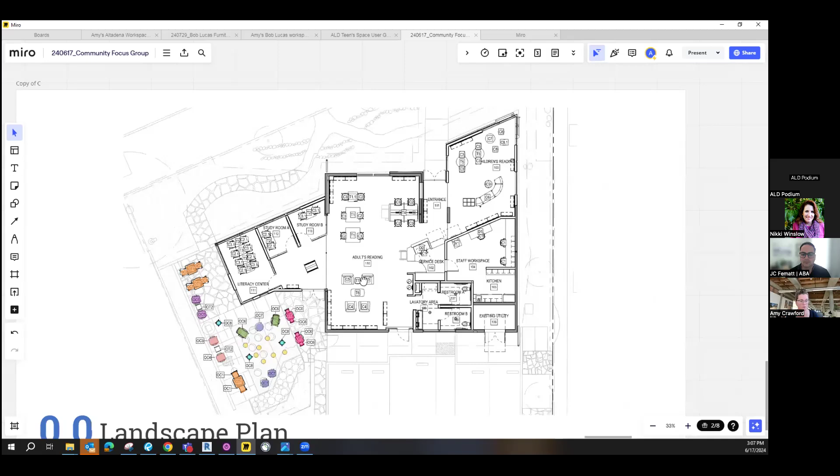Zoom out just a little. And the parking, we got through the county number and all that stuff. Oh my gosh, bus stop. I think we got the bus stop moving. It'll be, so the bus stop is just going to shift up the block. So we'll be in good shape.

I just never... so the two, three, or four staff working take up four of the nine spaces, or something, right? Is that what we have? There's twelve spaces, so they would take up four, and they can park on the street, or if they're renting, like bikes.

Indoor bikes. So here we'll have indoor bikes, I don't think we have it at Bob. Here would be an option. And this, they could put it in the staff area. It's not like there's a huge number of them, but either way, we got a bunch of them.

But it's been approved by the building department and the county planning, to have that.

Anything else? Any other questions? Is there a gate to Lincoln from the outside garden? Yes, that's what the walk path is, right? Exactly.

Our guess is that will not be used a whole lot, that's more for maintenance.

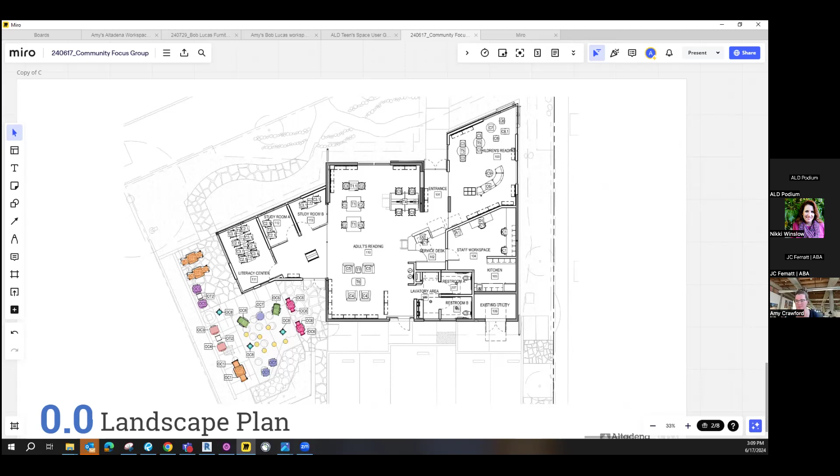And we are maintaining the garden, the food garden or composting space that is on the west side. There were specific questions and we made sure we got that in the spec—the irrigation needs to remain on. They're doing the grading now and it's just a terrible mess, so don't judge by that. Give it a month and it should be cleaned up, and then we'll have it better.